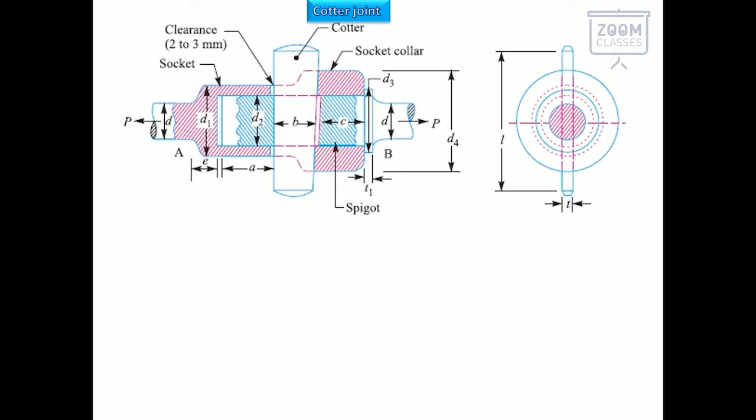Today we'll be learning about Cotter joint. The diagram of the Cotter joint is as follows. A Cotter joint is a temporary joint which is used to connect two mechanical components. It is made up of three main parts.

The first part over here is a socket which is highlighted in red. The solid shape of socket can be seen as follows. A socket is made up of three main parts: socket collar, socket end and socket rod. The same can be seen in the 2D diagram: socket rod, socket end and socket collar.

The second main part of a Cotter joint is spigot, which is highlighted in green. The solid figure of spigot is as follows. A spigot is also made up of three main parts: spigot rod, spigot collar and spigot end. As you can see, both the socket and spigot have a slot created on them.

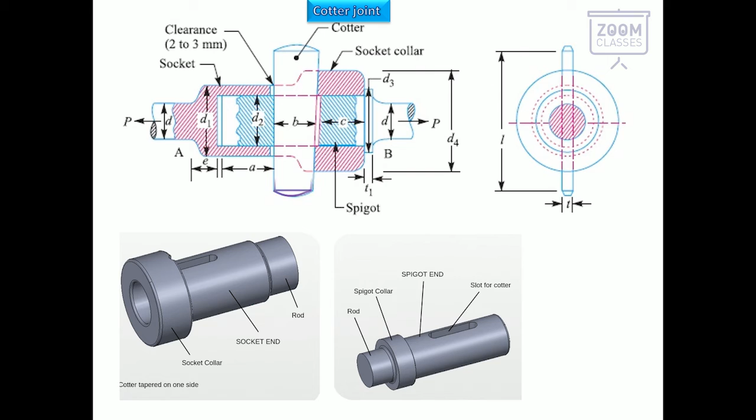The third main component of a Cotter joint is a Cotter itself, which is highlighted in violet. The solid shape of Cotter is as follows. Now, to understand Cotter joint more precisely, we'll try to assemble 3D diagram of a Cotter joint. As we know, a Cotter joint is made up of three parts. The blue one is your spigot, the orange one is your socket, and the green one is the Cotter.

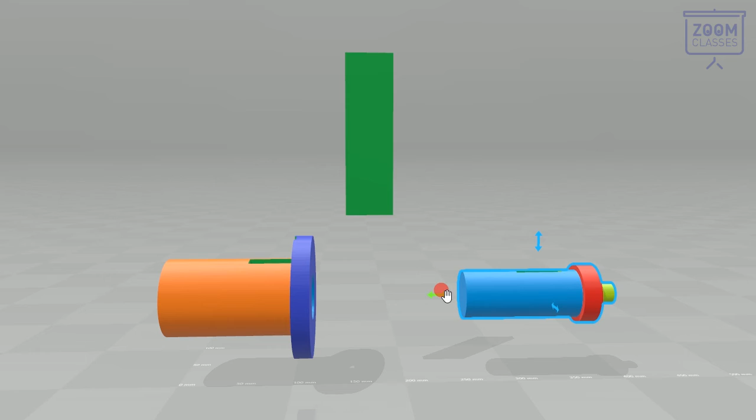Now to assemble them, what we need to do is we need to drag this spigot inside the socket. The socket will allow the spigot to enter only up to its collar. Now, before we insert the Cotter in the slot, we need to see whether both the slot of socket and spigot are perfectly aligned.

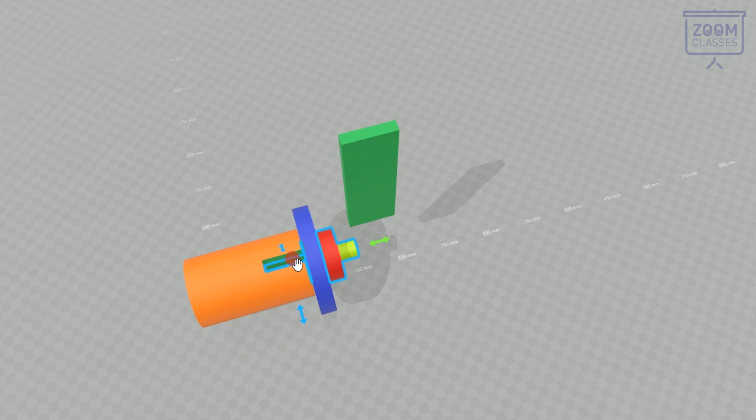So as we can see, the slots are perfectly aligned. Now we are ready to insert the Cotter. So as we can see, our Cotter joint is completely ready.